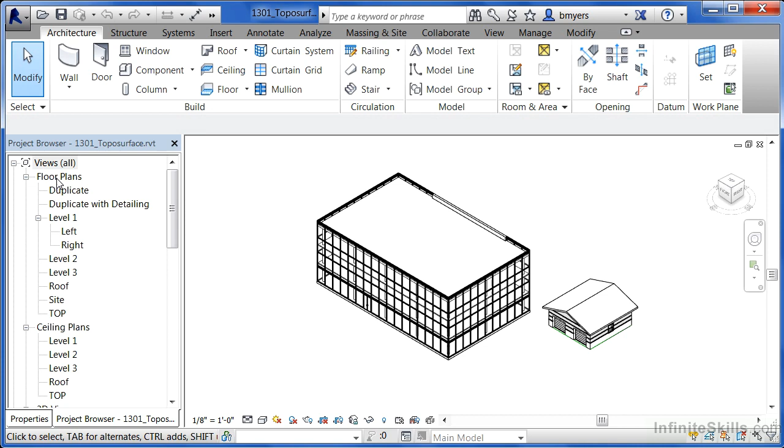In this exercise, we're going to learn how to create a site for our building complex. To do this, we first need to come underneath Site in our project browser. Under Floor Plans, we're going to open up the Site view.

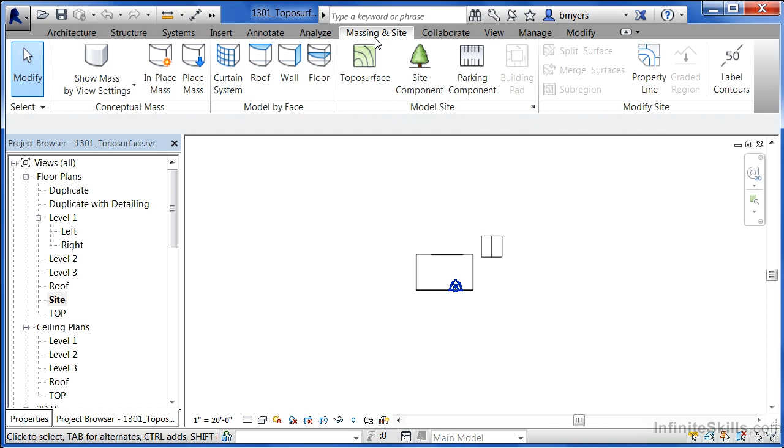From here, we can zoom out so we can see the outer extents of where we may draw our site to. Now we need to use the Site tools, or in particular the Toposurface tool, to draw in where our site is going to be located at. To do this, come underneath the Massing and Site tab and pick on Toposurface.

Where it says Elevation, let's give this an elevation of 3 feet. And the first spot that we're going to pick is going to be in the upper left-hand side of the screen. Pick another spot straight across from that previous spot that you picked, but in the upper right-hand side of your screen. For the next elevation, make this be a much smaller number.

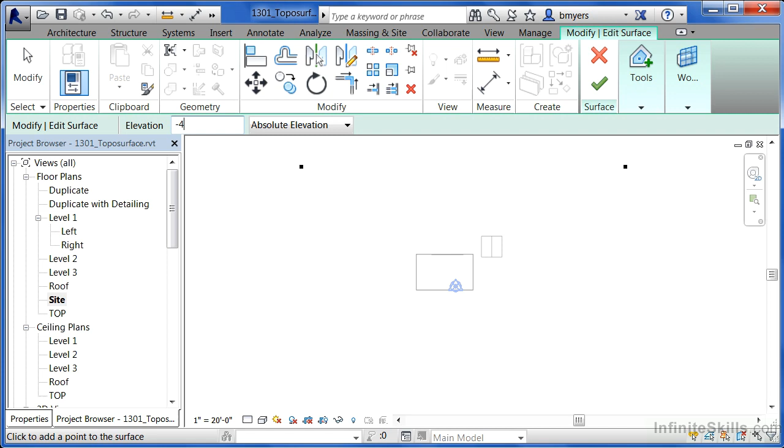In this case, we're going to do -4 feet. Click somewhere right in this general location. What it's done is it's automatically created our different contour lines from this elevation down to this elevation.

Click again down over in this area, and we can see it continuing to create our site and the contour lines that are associated with that. As for the elevation I like to have around the building, let's make this be -8 inches.

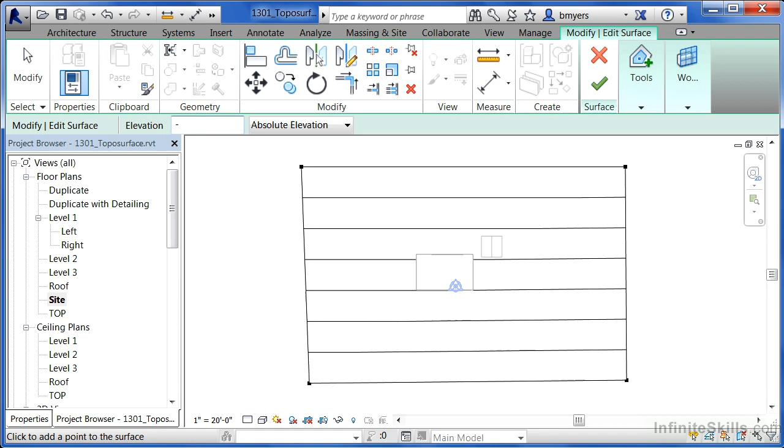Pick each of the corners that are going around our building. By doing this, those spots are at -8 inches. You can start to see that this is sort of going around our buildings now instead of going directly through the buildings, and it's all starting to flow down and in this direction.

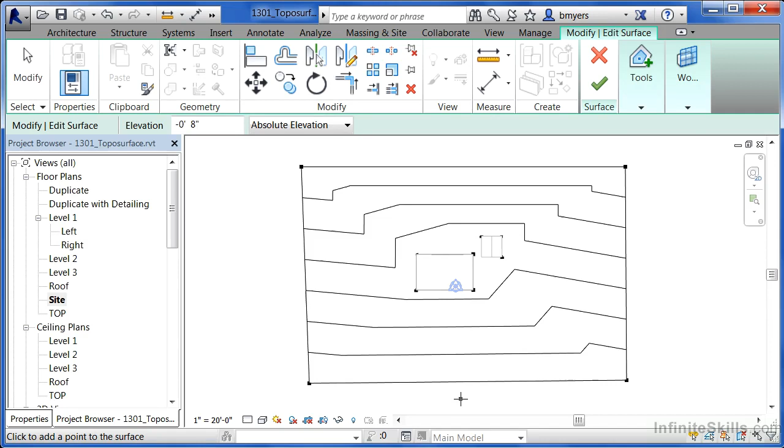So if any water starts to fall due to rain or whatever the case may be, it's going to start to flow toward and then ultimately around our building down toward this portion of the site. Now that we've done that, click on the big green check mark to finish that off. Come up here to the top and click on the little house icon, the 3D view command.

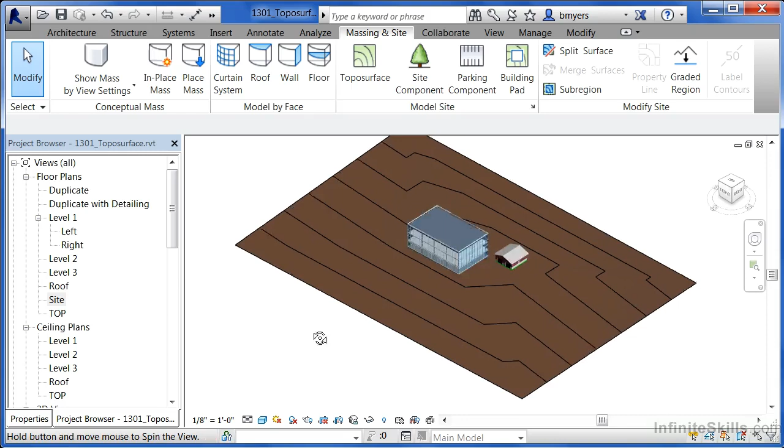Here's the site with its contours. If we move down here to the visual styles, we can even turn on shaded to start to see some color. You can spin your model around by holding down the shift key as well as the wheel on the mouse to see how it's sloping down.

Our building is currently sitting right there on the site. So we were able to create this topo surface, also known as a site, by coming up here on the Massing and Site tab and then picking on Toposurface and picking each of these points and setting the appropriate elevations for each of those point locations.